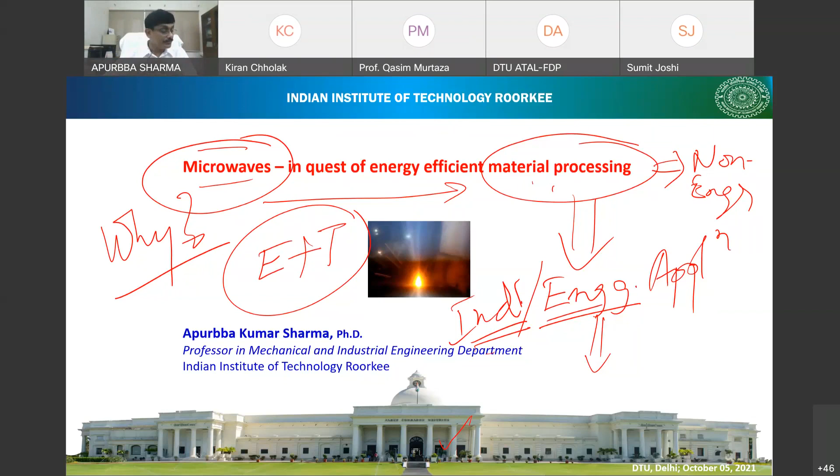Out of these things, we have also tried to make a few contributions in this field. And more and more research will bring this process closer and closer to industry adoption, right? Now, as I said, today's priorities are E plus T, so energy plus time. We are looking for energy everywhere.

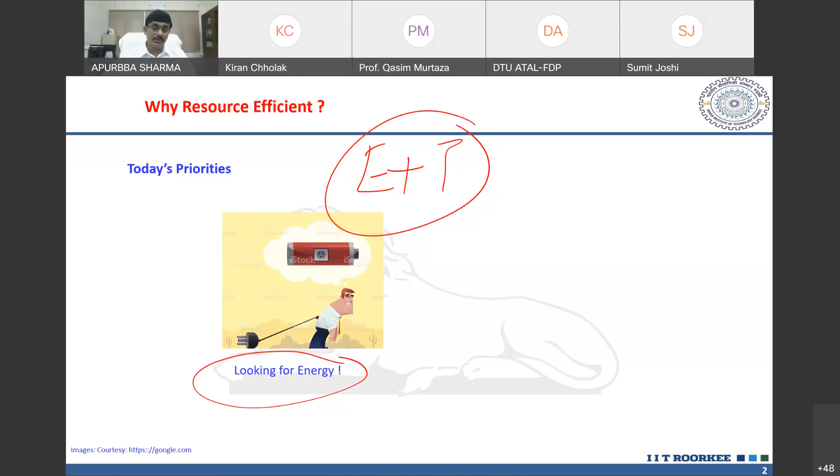There is a sort of crisis. You can see how the cost of energy, like fossil fuels, is increasing. Their cost of production is increasing, their extraction is becoming costlier and costlier, and the source is limited, right? Therefore people are looking for more and more new energy sources which are naturally available. One naturally available source is solar. I should not say best, but in terms of the quantum of energy available, it is enormous.

Then people are trying wind energy, people are trying tides, and hydro is already there. So people are trying more and more to explore these so that we can adopt more and more sustainable approaches.

So in this energy crisis, probably if we can have some energy sources where the actual energy used is only 1/10 of the energy in other conventional sources. Although all of us know energy can never be destroyed or produced, it is only a transformation from one form to another.

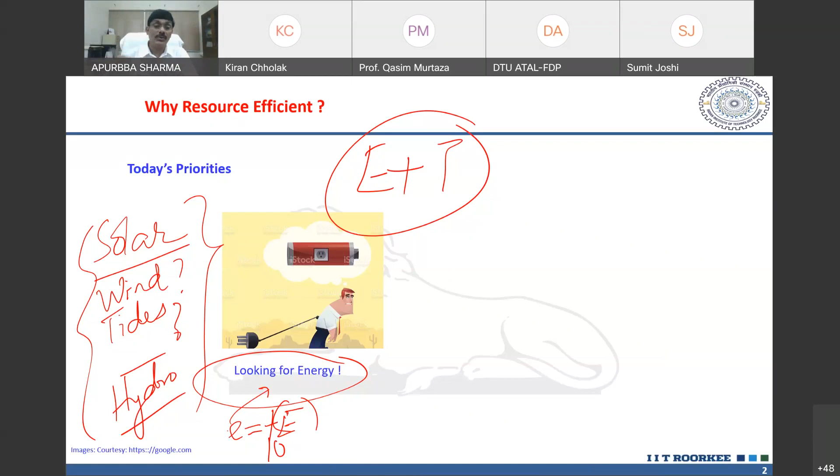Now here's what is happening: for processing 1 kg of material, whatever energy you require in the conventional mode, if I use another source which requires only 1/10, is it not something like we have spare energy? Nine times the energy we have spared from processing the same material, it's like we have saved nine times what I would have otherwise spent.

So therefore it's always there, how to get new energy sources. But from an engineer's perspective, what we are trying to see is, can we reduce the energy requirement for processing the same material up to the same condition? It's not that I'm talking about half-cooked things.

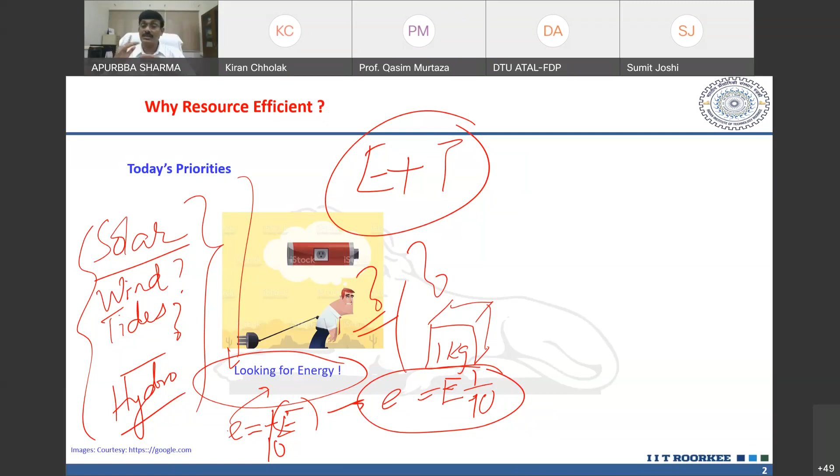Calculating half the energy required for half cooking is meaningless. So the same material processed up to the same condition, but using a different source of energy which requires 1/10 or say 1/5, even if it's 50%, that's a big gain in terms of energy requirement, right?

Similarly, nowadays people are running like anything. After this, I want to do this, I want to do that, I need this within half an hour, I need this within 10 minutes. We don't have time for even taking a cup of tea calmly. While taking tea itself, 10 different phone calls will come, and we may have to attend to this and that. Sometimes without even finishing the food, one is running.

So we don't have time. Now in this case also, if the same task can be done in 1/10 or 1/5 or half the time, then it will be great. That means my processing time is getting reduced, and there I score an advantage. How do I score an advantage?

Nowadays most business houses are running neck to neck competition, trying to make things available to you, be it service or product, at the earliest. That's the competition. So if you're looking for a 4-wheeler, if one dealer says I will make this model available next week, another dealer will say why next week, I will give it to you this week itself. Same with e-markets, everybody is in the race.

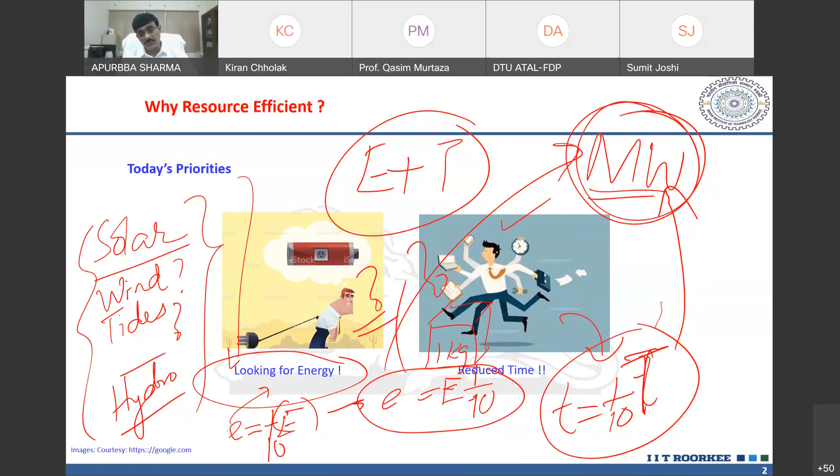So with this background, let me explain a few things with the help of some data published by others, and there is also some data from my own lab.

So if we see why we need to be resource efficient, or why we need to be energy saving, let's look at the requirement. Energy consumption is about 1.4 lakh, or 140,000 terawatt hour. What are the contributions? If we talk about 100,000 terawatt hour, at present crude oil and coal are there. But as you know, these fossil fuel reserves are limited.

And the rate at which we are going, see from 1800 to maybe 1900, the rate was very, very slow. Then from 1900 to 1950, probably it is a bit high, the slope is a bit high. Then from 1950 onwards, you see the slope.

So this is theta 1, theta 2, and theta 3. So these are, if you see, in this scenario, probably we won't be able to sustain it with our available energy. We won't be able to sustain for long. It has already crossed this energy requirement.

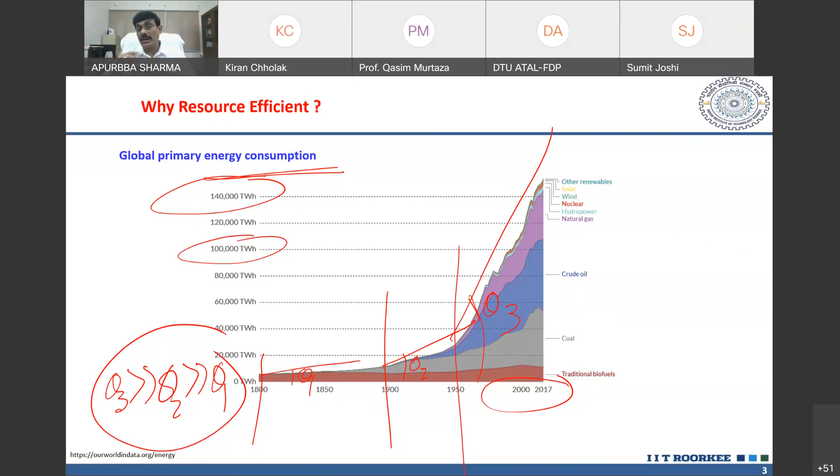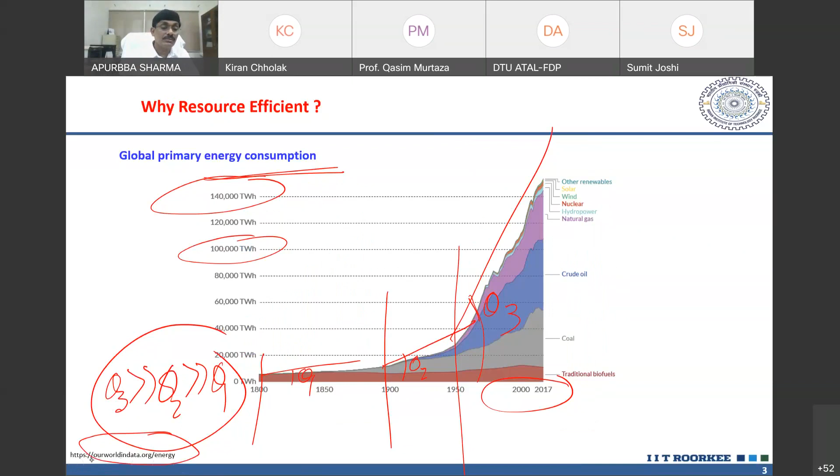Okay, let's see. Of course all this data is taken from some sources, as you can see. I have given you the references also, taken from some other sources.

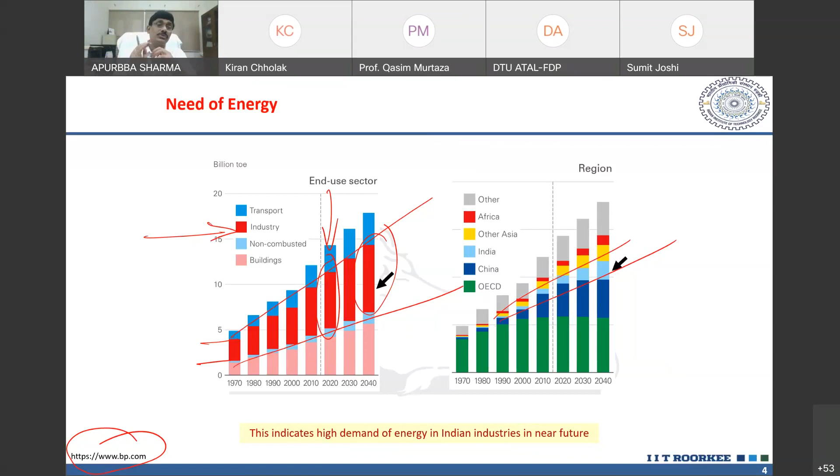Ours is a very big country. Population-wise we have 1.3 billion population now, roughly. That's incredible. And if we calculate energy requirement per head in this country, it is huge, really very huge. Therefore, if we can have some techniques which will reduce energy consumption, it is always better for our sustainability, right?

Then if we talk about manufacturing alone, out of this 100%, manufacturing alone is 40 plus 30, 70%, around 70%. That's in this decade, the previous decade, and it's going to remain almost the same, as the projected figures of 2040 say. Projected figure of 2040 also says 70%.

That means the manufacturing activities' energy requirement is not coming down, and therefore it is very important that we get the energy for manufacturing activities sufficiently in future also. And that is where our need for getting better and better processes or better and better sources becomes very important.

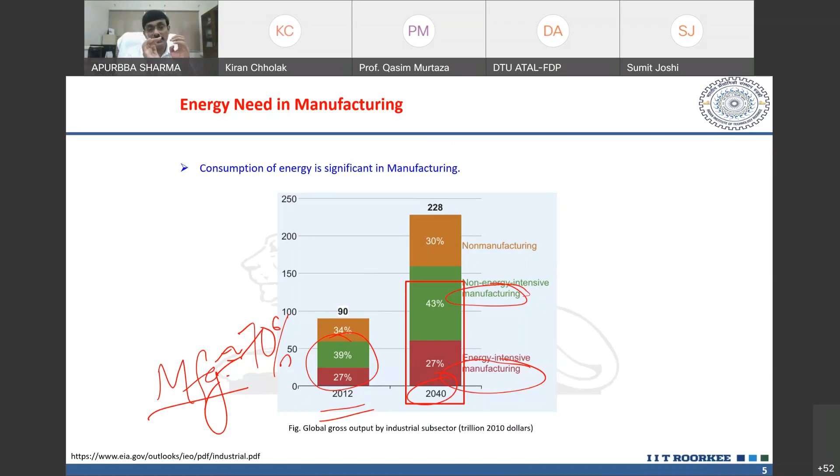Now, if we talk about energy requirement in manufacturing, in material processing, to do some work we need some energy, some form of energy. If we do it by hand, our body is giving that energy, and to the body we fill that energy source by taking some food, same thing. So in whatever form we take energy, somewhere, somehow there should be some source, and that energy will be required for doing several kinds of work.

In manufacturing, one of the very important ways of using energy is interaction with heat. Most manufacturing activities, like casting, welding, different heat treatment processes, hot forging - all these processes need heat during their material processing, and that requirement is huge, as I said.

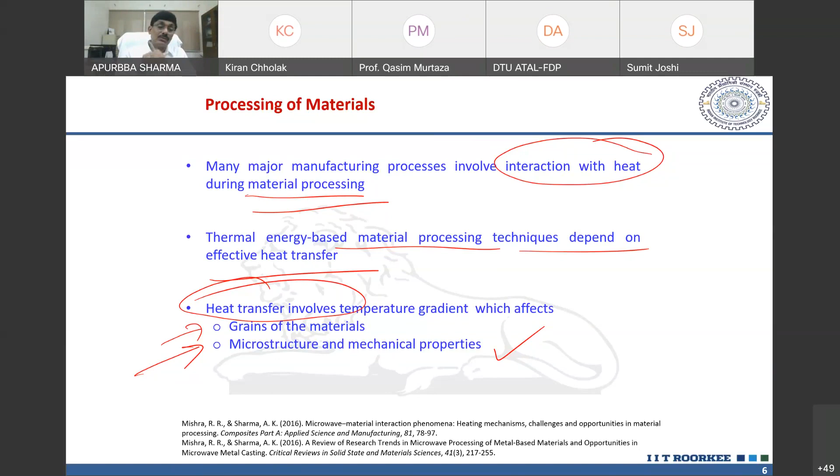But if we examine very attentively the material nearby that hole, there will be a heat affected zone, which is undesirable. We want a hole, but we don't want to spoil the material around that hole. So the microstructure and mechanical properties around that hole get affected. This we call, in our terminology, the heat affected zone.

So that means the mechanical properties and microstructure of this zone are changing. Now our idea will be how we can minimize this zone, call it HAZ. If not zero, we should try to make it zero. So smaller the HAZ, better is the product, or you can say better is the output.

Now, some processes like laser and all, although this is there, it is very limited, very small, this HAZ. But some processes like EDM, the HAZ is very, very high. And that's how, in some cases, that process is not preferred. It's one kind of limitation of the process.

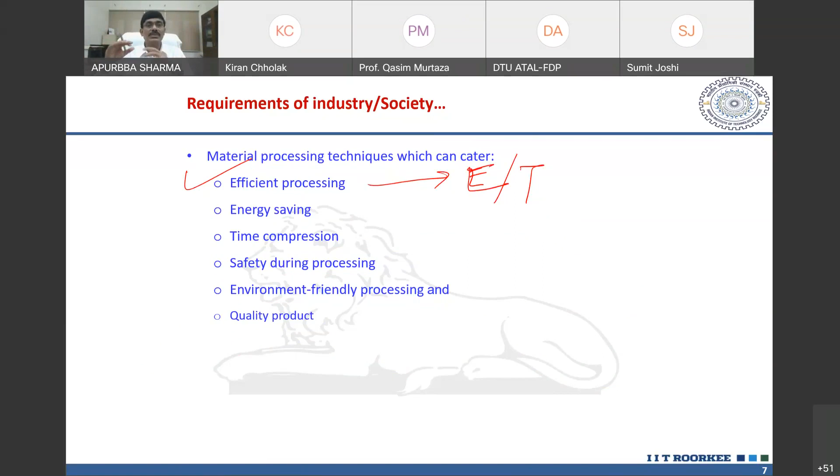So people are looking for efficient processing. As I said, we don't have time, we have limited energy, we have very limited time. So we want efficient processing - machine wise, equipment wise, source wise, everywhere the persons involved in these processes need efficiency. As one example of this, I will be talking about energy and time efficiency here - energy saving and time compression. So we are looking for these two here, energy and time.

Safety during processing is required irrespective of any process. You might have seen in laser work centers, wherever laser processing is there, they will put some warning labels or posters that this is the danger zone, so please don't enter without protection, or be careful while entering. So processing safety is required irrespective of the process.

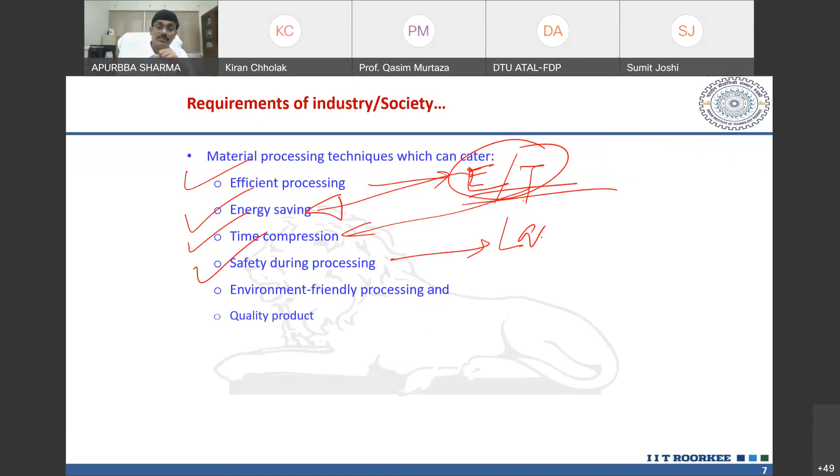And in processes where energy sources like laser or microwaves are involved, one will have to take extra precaution for safety. These are essentially different sources of energy with different characteristics, which work in a different way, and therefore one needs to take care of those things while working with laser or microwaves.

Then environment-friendly processing is also another thing. As you have seen, laser processing on-site is very environment-friendly - no smoke, not much heat radiated, no smoke created otherwise. That's a plus point of working with laser. So is with microwave - no on-site heat produced, no on-site smoke produced. These are some advantages that contribute to the environment at the site where material processing is going on.

But of course, if you ask me, is it always safe or always environment friendly, then probably not always. We are using microwaves, or for laser we are using electrical energy, and we will have to admit that wherever that electrical energy is being produced, probably some carbon footprints are being created. If it is a purely natural source like hydro energy, it is pretty less. But if we are using others like fossil fuels, then the carbon footprints produced are relatively high.

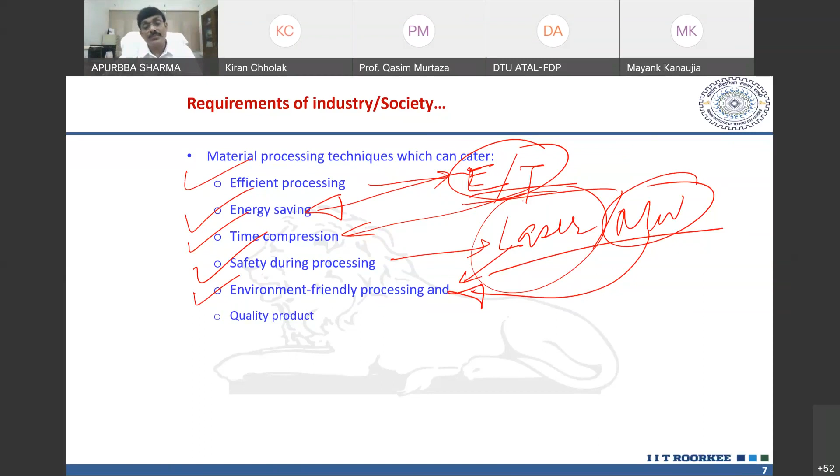Then quality product. This is another important thing. Nowadays, people have money. They are ready to pay, but in return they want quality. So money they are ready to spend. Even for a phone, I'm not talking about everybody, but why do we need a phone? Okay, now it has become a kind of multitasking device, but earlier we needed it only for talking or sending a message, some mere kind of communication.

But for that, maybe a 5,000 rupees handset will work, and a 50,000 rupees handset will also work. A 1 lakh or 5 lakh handset will also work. But people are spending money on that. They are spending more money, provided they get a better quality product. And in this, as I said, mechanical properties are very, very important.

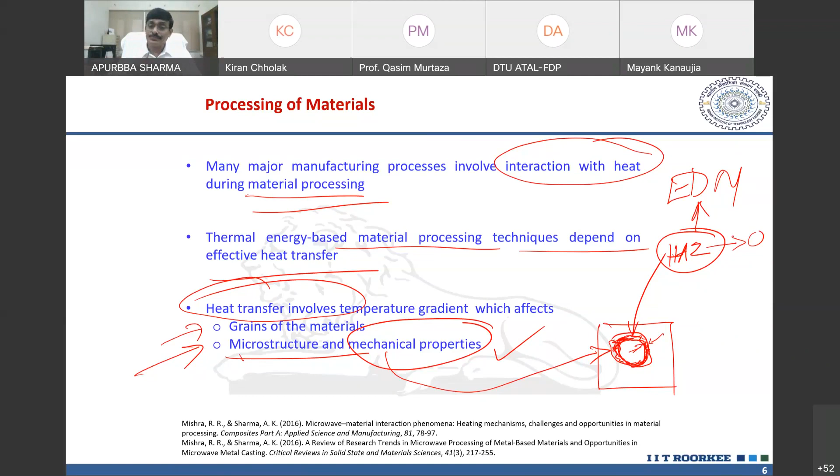So what if my energy consumption is very less, but while doing the work, I have lost the mechanical properties of that part, or the part is no longer useful? Or I'm using 50% energy, that's fine, but it is taking double the processing time of a conventional mode. Then also it is not useful, right? Therefore, quality product, as well as energy efficiency, as well as time efficiency, all these things need to be taken care of while producing a product or services, right?

And in this, I'm very happy to share with you that if you use microwaves for material processing, many a times people have reported that quality improvement is there. That means with microwave, you can find energy efficiency, time efficiency, as well as better quality. Now, if all these three major requirements are satisfied, or it has the potential to satisfy them, then probably it is worth looking for a process which could be a sustainable solution to this.

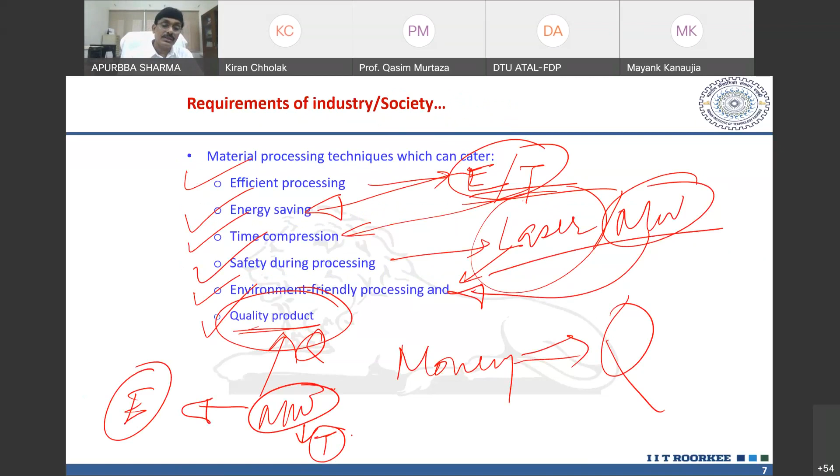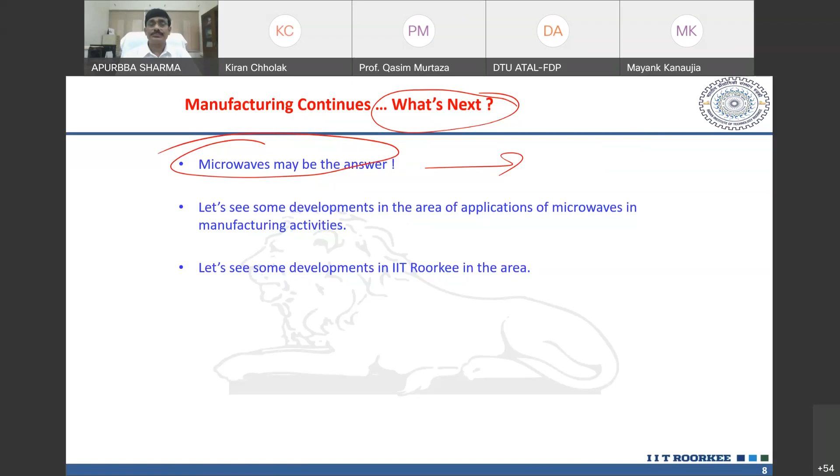So as I have already said, for all these requirements, if we ask what's next, which can give me the solution for energy, for time, for quality, probably microwave may be the answer. And how this is not a probability but a reality, I will be showing through some data, my own data and data published by other people. Right? Fine. So some developments I would like to show you, and some of those are from IIT.

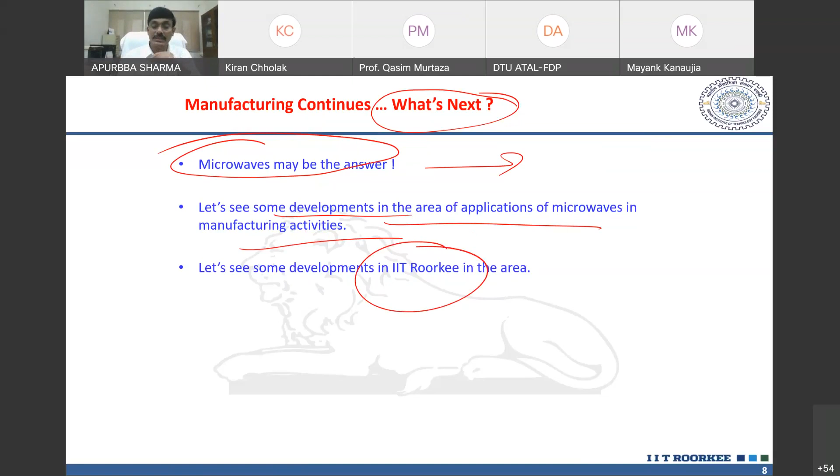Professor Murtaza? Yes, sir, please. Okay. Everything going fine? Yes, sir. Am I audible? Everything is fine. Okay. Yes, sir. Right. Thank you. Yeah, thank you, sir.

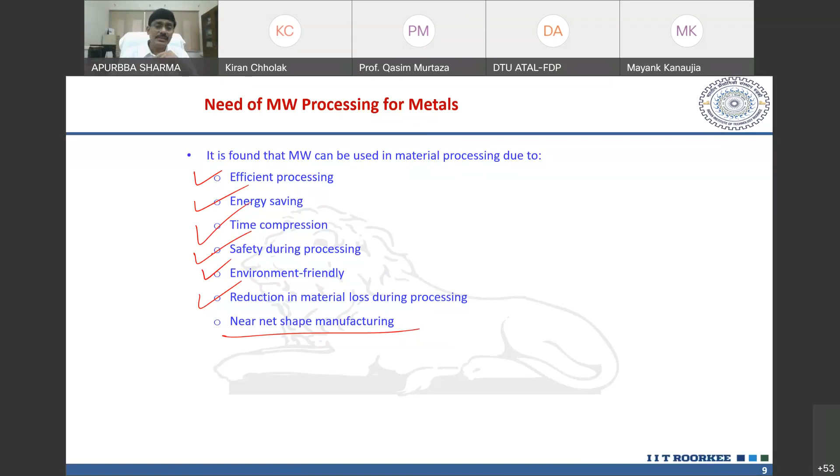So already I have told about energy efficiency, time efficiency, safety, environment friendliness, then reduction in material loss during processing. This is another factor. And then near net shape manufacturing. This is also another aspect. You do not need secondary processing after this in most of the cases, right? That also helps in energy saving, cost saving, time saving. If in one go you can have a near net shape product, then you need not go for secondary processing, which involves time, energy, material handling. So all these things are very, very important.

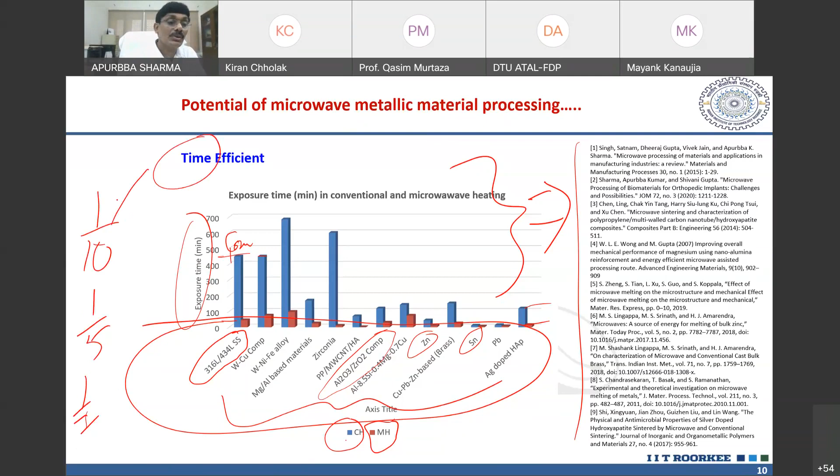And here we have found the requirement is 1/10, 1/5, or half, or whatsoever. So this is incredible. Oh, sorry, this is time requirement. Sorry, I'm talking about time. Okay. Similarly for energy also. Now let us see the energy requirement.

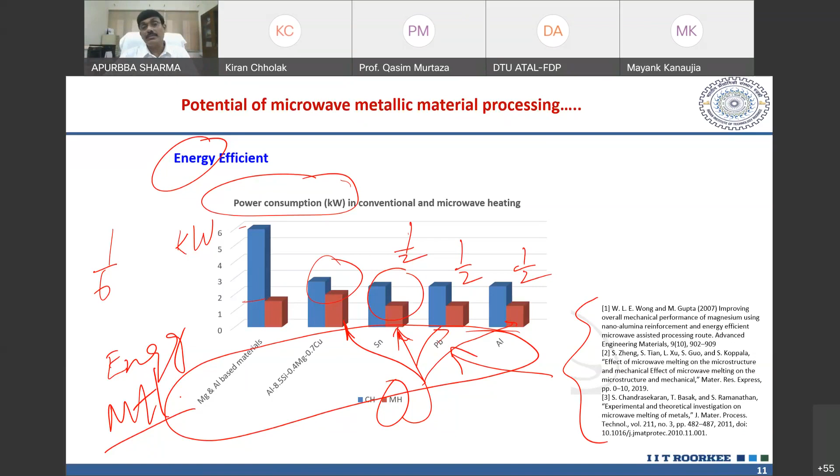I'll try to show you some data, and with those data, I will try to convince you that microwave has got better possibilities or better opportunities to be used in industrial use, which can help us in achieving energy sustainability, or achieving better processing time. Let me give you one more example here. This is again published data, not my own data.

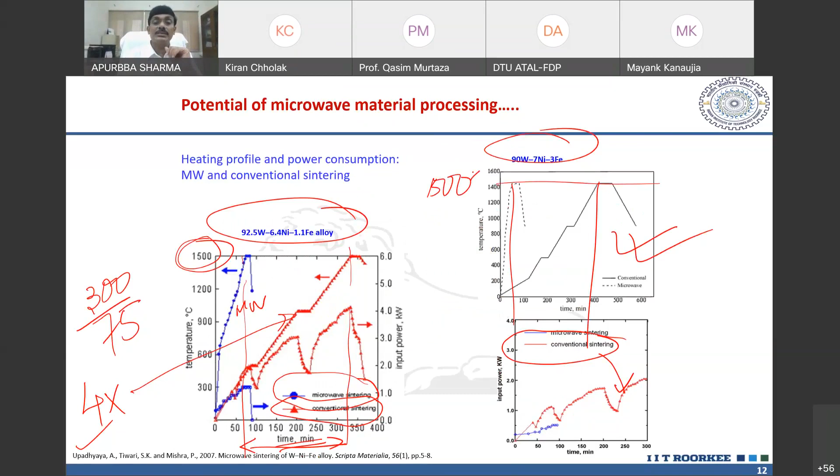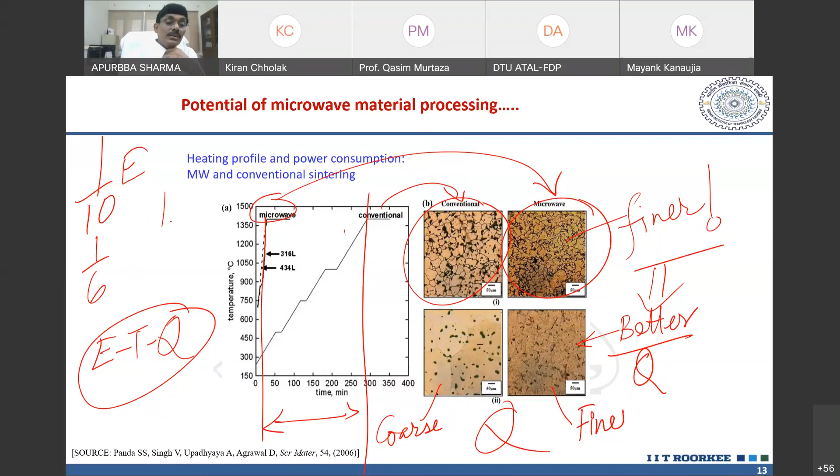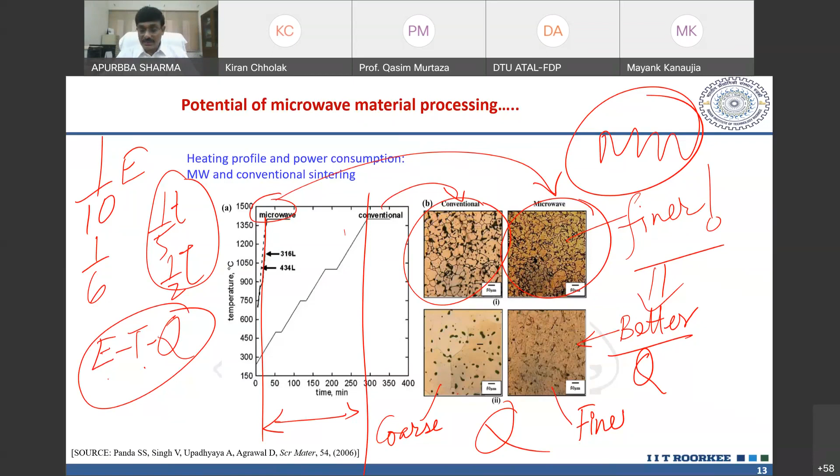We are taking 1/5, 1/2 of time for processing, and at the same time, we are getting better quality product also. That means all these criteria are getting satisfied while using microwaves, right? Therefore, I think this much is sufficient to establish that yes, it has got better future or better potential to be used in material processing.

However, the things are not very easy. It has got its own challenges. A lot of challenges are there, and that is the reason why it is getting delayed. We do not know much about these microwaves. Microwaves, from the very beginning, are being explored more and more for communication purposes, not for material processing purposes. Therefore our knowledge is limited, and once we do more and more research, we will have better knowledge, and we will be able to use it in a better way.

Then operating condition, power, frequency. So here also it is one more thing. The operating condition, you cannot use it like welding torches. You bring it to my room, you can do some welding here. With microwave or laser, it is not the case. You need a specialized equipment, and you need a kind of specialized environment also. In laser nowadays, you can take it a few meters using optical fiber cables. But in microwave, that condition is yet to be achieved.

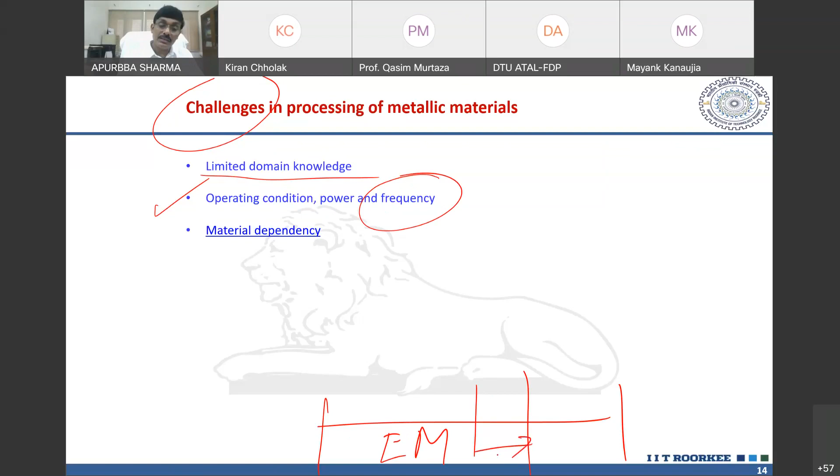Then frequency is also another thing. We do not have all the frequencies available in our electromagnetic radiation bandwidth. This is nothing but EM, electromagnetic radiation. In electromagnetic radiation, there is microwave, laser, visible light, infrared, UV, and different spectra. All these are within certain frequencies of electromagnetic radiation, right?

Within this microwave radiation also, we cannot use all the frequencies. We have some limited: 2.45 gigahertz, 915 megahertz, and then 30 gigahertz. Only a few frequencies are allowed for industrial use. So it is not that tomorrow I can say I want to use 3 gigahertz. No, that is not permitted.

In microwave itself, some frequencies are being used for communication. And in communication, some are used for television, some for radio communication, some for defense communication. In radio communication itself, for civilians there is a different frequency, and for defense people there are different frequencies. That's the reason why we cannot hear what the defense people are talking about. They use very specialized frequencies and equipment to transmit and receive. So these are some of the challenges. We don't have the liberty to use whatever we want.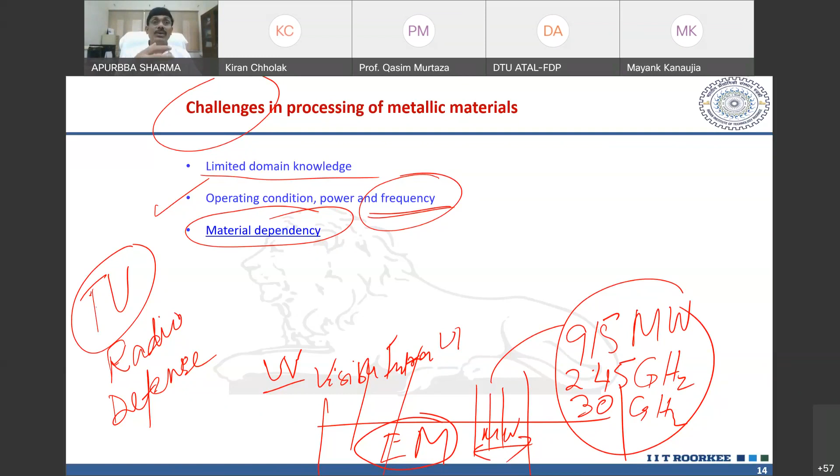They say microwavable. They will give you some cookware which can be put inside the microwave oven, but it will never get affected. Keep milk inside that pot, the milk will get heated up. If you keep rice inside, it will get cooked. You keep meat inside, it will get cooked. But that bowl or plate will not get anything.

In fact, it will not get heated also. That is the beauty of material dependency with microwave. Okay, you are keeping on a plate, say meat, say potato or whatsoever inside that microwave oven. Potato will get boiled, means there will be lot of heat. But the plate or the bowl in which you are keeping that, it will not get affected. It will not get heated up. So it's a kind of wonder. Why it happens, that also I will tell.

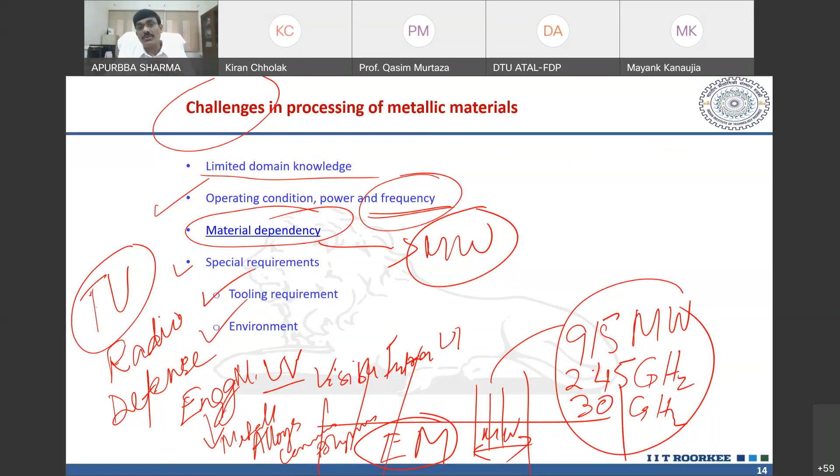Then environment also. As I said already, for laser and microwave, we need some kind of protected environment so that safety can be ensured. Then in some cases, now we are doing research, we need noble gas environment, like argon gas environment, or in some cases liquid nitrogen, or sometimes we are using water, some dielectrics. Inside that dielectric, we are doing microwave machining. So that is a kind of environment that is required for doing microwave processing.

So even though all these limitations or restrictions are there, people are working on processing materials using microwaves. Almost all types of materials are being processed, like ceramics and CMC, meaning ceramic matrix composites, MMC, meaning metal matrix composites. Then chemical synthesis also people are using, and it is found to be very effective. Chemical reactions get enhanced; the speed of that reaction becomes very high. Then rock, cements, medical and drugs, very effective. Polymers and PMCs, polymeric matrix composites. Of course, food and drying, it is there in any kitchen.

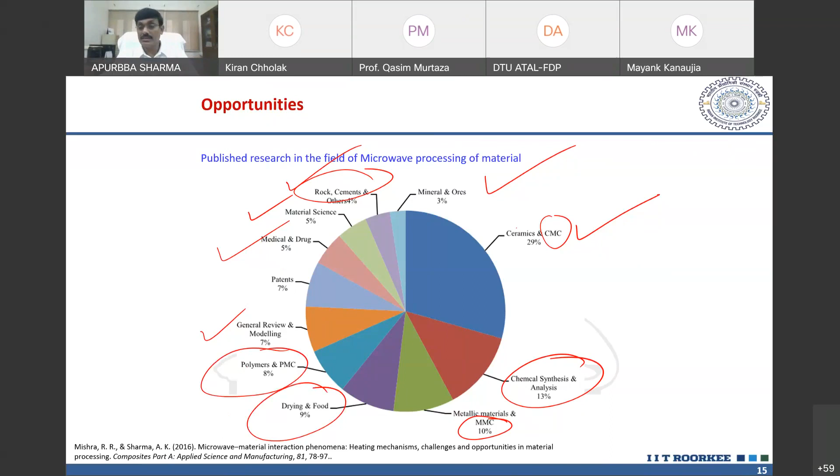However, there are opportunities. Although we have processing constraints as far as the materials, frequency, power, and safety are concerned, still there are ways to do it. As I said, today I can join stainless steel to stainless steel, weld stainless steel to stainless steel, or weld two pieces of Inconel by using microwaves. So there are opportunities. It is now my inability to develop a device similar to or better than that welding system. If I can do that, probably microwaves will work in that mode also, right?

Then target metals, ceramics, polymers, and composites, PMCs, CMCs, and MMCs. All these can be processed with microwaves. Then other materials also, glass and chemicals. Glass we are processing. We are working on glass drilling. We are trying, and we have got some success. I should not say we are completely successful.

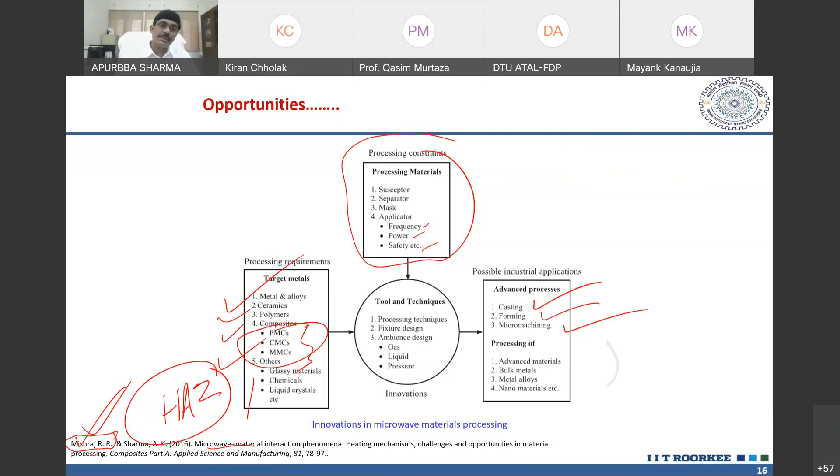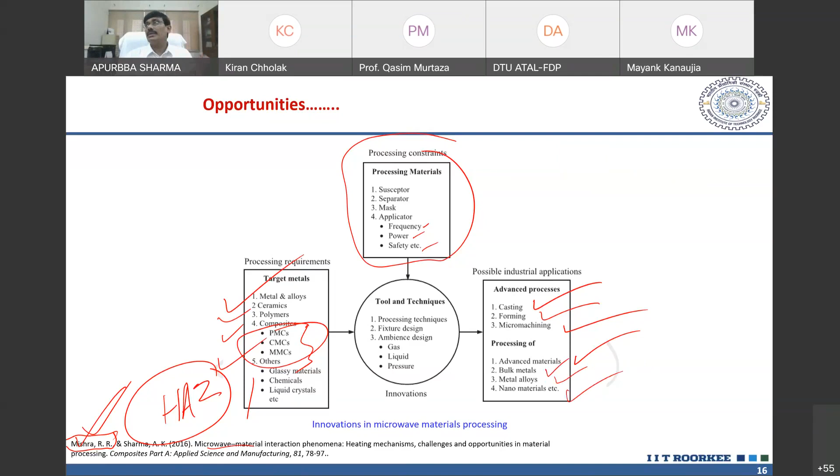Then possible industrial applications: as I said, casting, forming, micromachining. We have filed patents in casting and micromachining, and we are waiting for some more. Then advanced materials: composites, cladding, etc. we have developed. Composite joining we have done, composite curing we have done. Bulk metals, alloys, nanomaterials we have worked with. So for various materials we have used it.

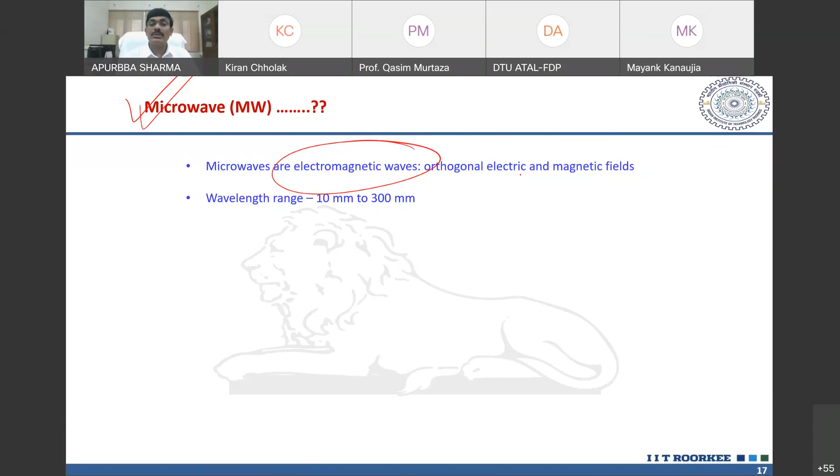Now let me give you a very brief idea about what microwaves are. Microwaves are nothing but electromagnetic waves, with two components orthogonal to each other. One component is electric, the other is magnetic. If one is in this plane, the other one is in this plane. I will show you. And the wavelength is this, as I said, and the frequency range is corresponding.

Originally they were used for communication, but later this gentleman, Percy Spencer, found out that they can be used for material processing also. He was a defense communication engineer working on defense projects, using microwaves for his communication equipment. He was working in a camp where the temperature was below 0 degrees Celsius.

While working, he found that chocolate pieces he kept on his table near his equipment were melting. Is it not something very curious? He is working at a sub-zero temperature, and the chocolates are getting melted. That is sort of unbelievable, and he became very curious.

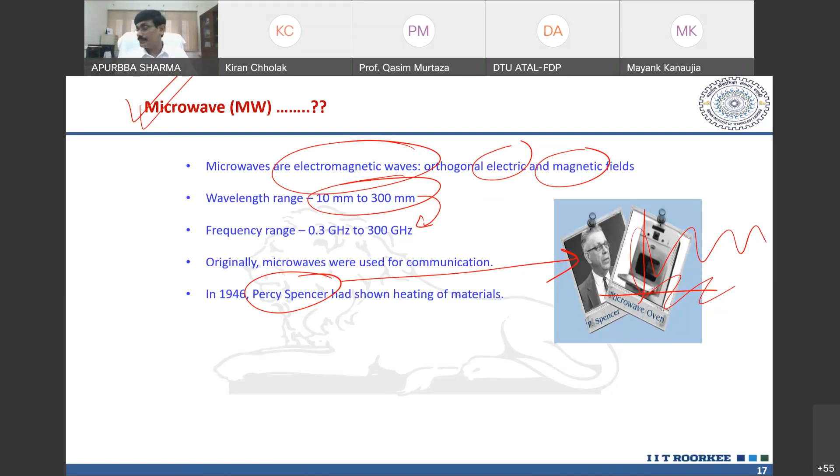After thinking about many things, he could find only one reason: the chocolates were getting melted only because of his microwave equipment. The equipment itself was very cold, he found. Therefore, it must be the microwave frequency he was using which caused this. That's how he postulated that microwaves can be used for heating materials, and he established it in the year 1946. That's why I say it is almost a 70-year-old technology.

And he developed a microwave oven. This is the microwave oven. It cost around 5,000 US dollars at that time, and nowadays microwave ovens are found for 50 US dollars, so it was 100 times costlier. He developed the world's first microwave oven for material heating purposes. He knew that it would work, and he got it patented. And the frequency used is again 2.45 gigahertz.

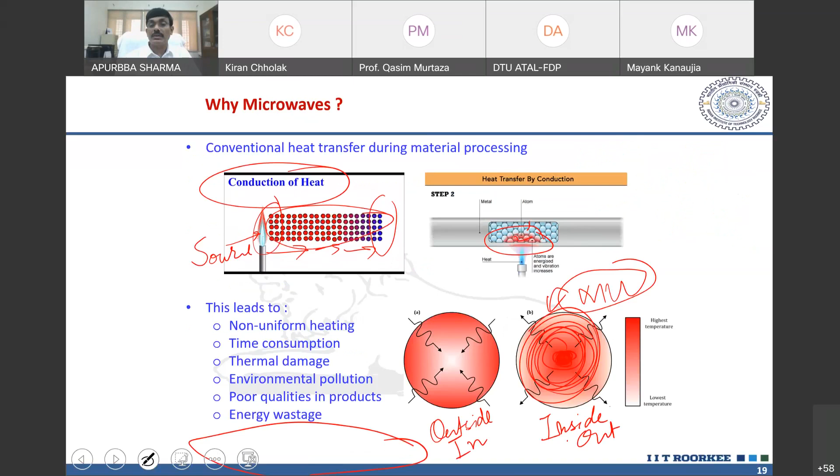Now, when you allow microwaves to move through this, because of the electrical component we've seen, when the positive half comes near this atom, what will happen? The negatively charged oxygen will be attracted, and the hydrogen will be repulsed. When the next half comes, the negative half, then the reverse effect will take place.

This takes place at 2.45 gigahertz frequency. So think about what that means - in almost 1 nanosecond, this reversal will have to take place, positive to negative, negative to positive. But because of their own inertia, it cannot follow, and therefore there will be a lag, or you can say a loss of energy.

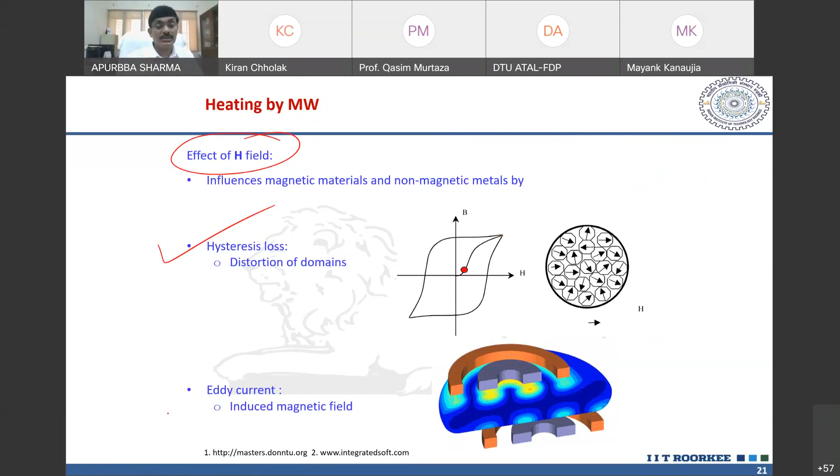This cannot keep up the same speed with that of 2.45 gigahertz frequency, and that causes heating inside the material. I gave the example of water, but there are other mechanisms as well, like conduction losses, dipolar losses. Similarly for the H field, magnetic field, there are mechanisms like hysteresis losses, eddy current losses for conducting materials, and electron spin. There are so many other things.

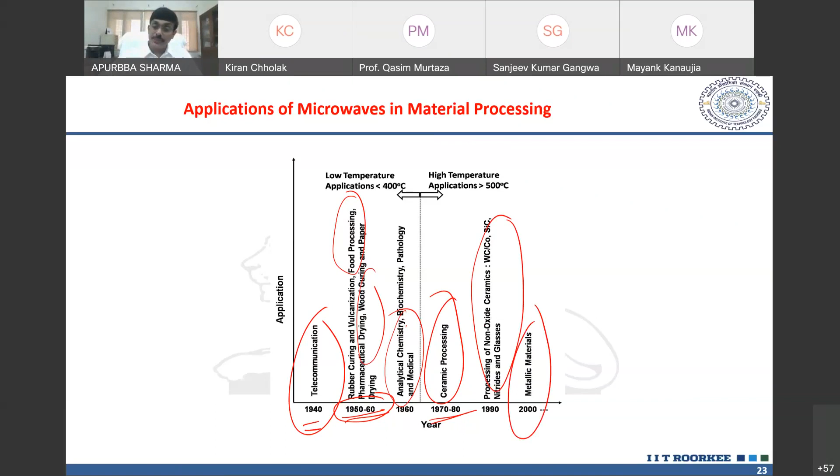I don't have much time, so I'll skip those things and give you a quick recap. Microwaves were used for telecommunication around 1940, then for rubber curing and similar heating applications. During the 1950s and 1960s, food processing was dominating with some industrial use too. Then chemistry people picked it up for chemical processing, plastic processing, curing, and ceramic processing. In the 1970s and 80s, serious engineering material processing took place. From 1990 onwards, it was extended to more materials, and from 2000 onwards, it got extended up to metallic materials also.

Now almost all sorts of materials are getting processed by microwave. We have published this in a paper, the Composites Part A paper. You can take the reference of this paper and look it up. We have given everything there.

As far as low temperature processing is concerned, a lot of materials like biochemicals, paper, cooking for different foods, wood, and some low temperature ceramics have been processed. These are low temperature applications, mostly synthesis and drying.

During the 1970s to 2000s, sintering was the dominant process, and there also microwaves were used for microwave sintering. Then drilling, glass processing, soldering, brazing - different processes used for different materials like carbon nanotube and other materials.

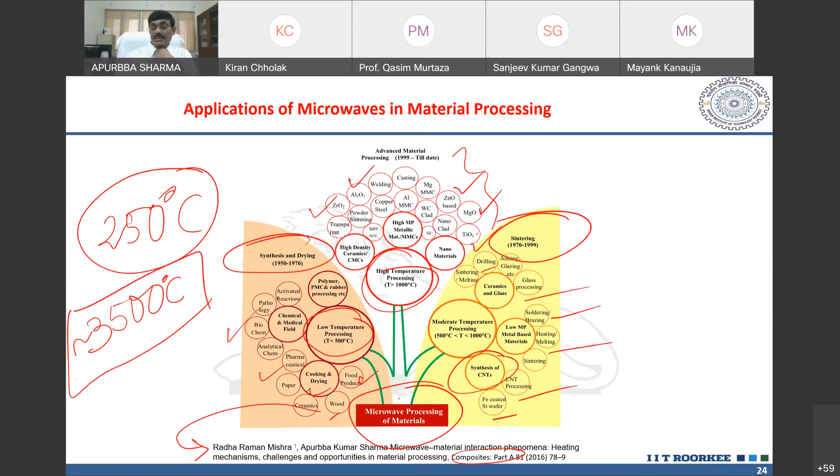I'll skip this, I don't have time. Rather, I will give you some examples of what we have done at IIT Roorkee.

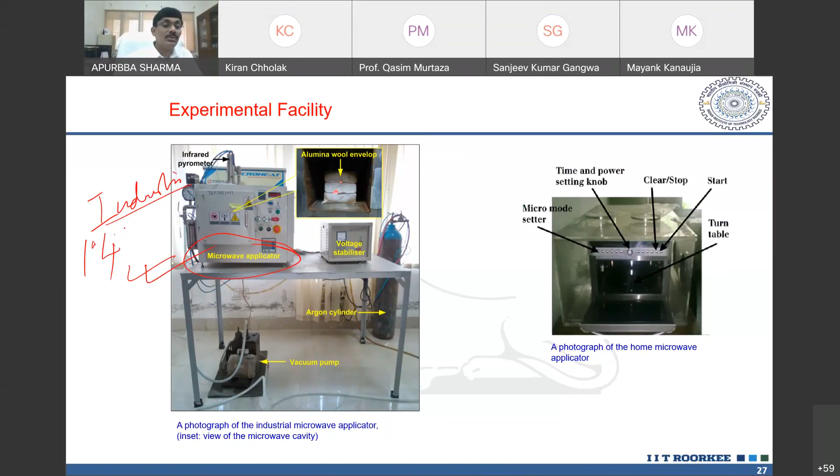This is one microwave applicator I am using in my lab. It's an industrial type but has only a capacity of 1.45 kilowatt. We have a vacuum pump also, and we have facility to put argon gas inside. So these types of facilities allow us to create different environments inside this.

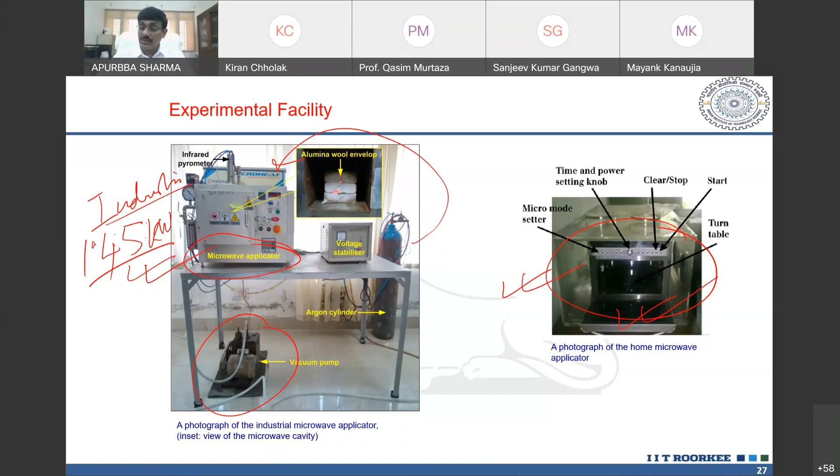Then we have one more type, which is actually a home microwave oven, whatever is available in the kitchen. We have been using this for several years, almost 15 years, for my research. Many PhD scholars have got their degrees using this oven.

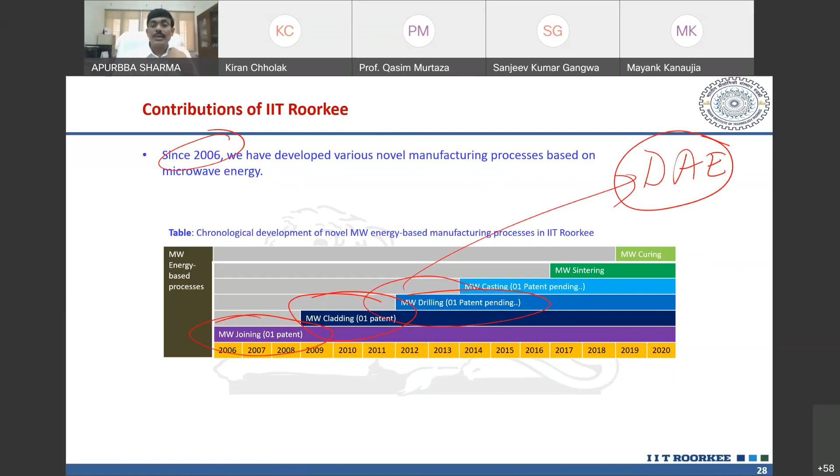Since 2006, we have been using these microwaves for various processes. One is joining - we have obtained a patent granted for this. Then we developed cladding, and we have got a patent for this. Then microwave drilling, we have filed a patent - this is a joint patent with the Department of Atomic Energy, DAE, for microwave drilling of glass material.

Then microwave casting - we have developed in situ microwave casting. Inside the microwave oven, you can keep the metal block or bulk metallic materials, keep a mold inside, and you will get the cast. That also we have done. And now presently we are working with microwave sintering and curing.

I'll show you some results. We are getting good results within very less time - less energy requirement and less time requirement are both getting fulfilled. Quality-wise, in many cases we are getting almost at par quality, in many cases better quality as far as microstructures are concerned, and in some cases we are getting bad quality, in the sense that we are getting more heat affected zone.

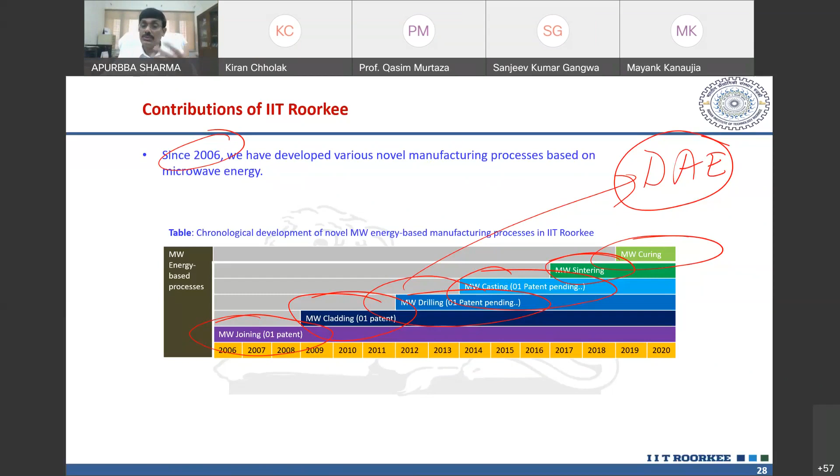Higher the heat affected zone, worse is the quality. So that I must tell you, okay, and yes, that is the case. So in those cases, you need more and more resources.

Say microwave casting. This was developed by my student Mishra and me. In fact, this was started with a BTech project group. They did some work, and later on they could not finish. BTech students have less experience and put relatively less effort in this, but nevertheless they got a good beginning.

And later on, Dr. Mishra has graduated and got his PhD degree. As a PhD scholar, he got it developed, and we got a patent for that also. We have applied for this, and now we are waiting for the final granting of that patent.

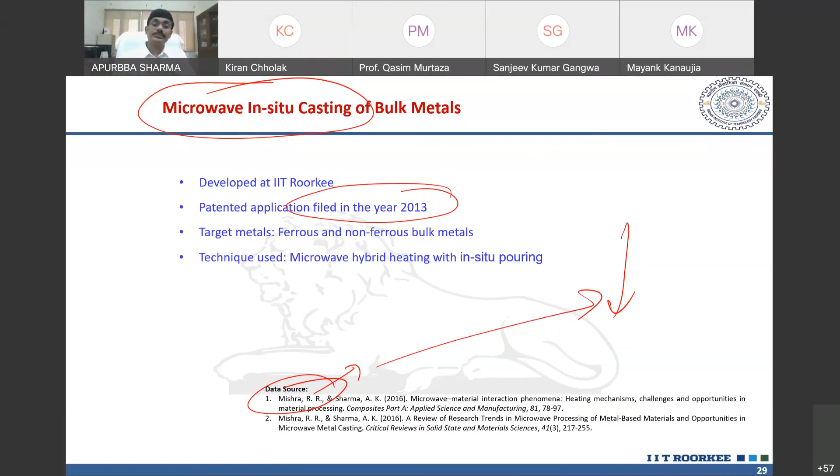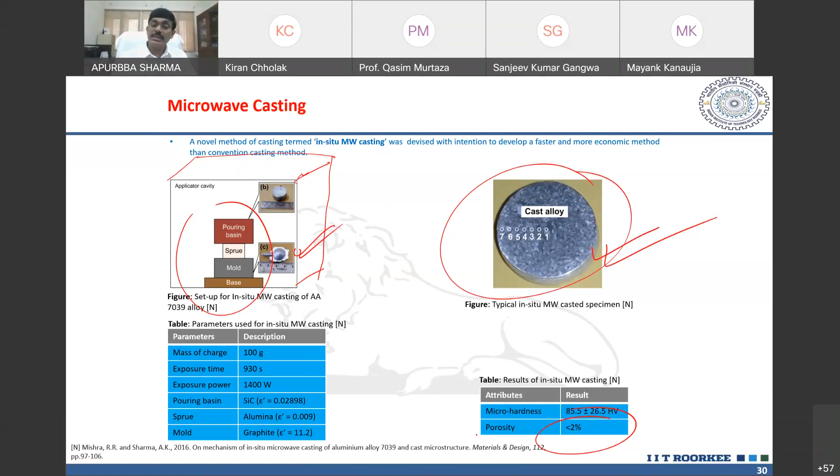And we have found that quality is even better. Porosity is very less, very, very less, okay? And microstructure is better. Properties are better. So we have characterized that microstructure, how at different locations microstructure can be different, that we have seen.

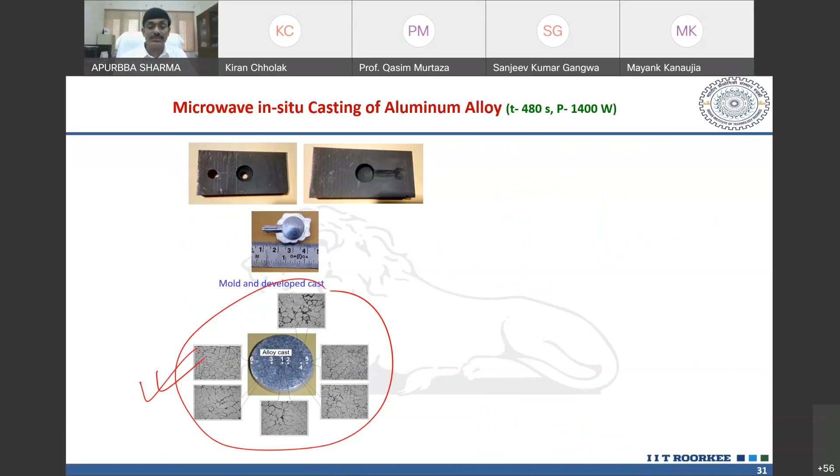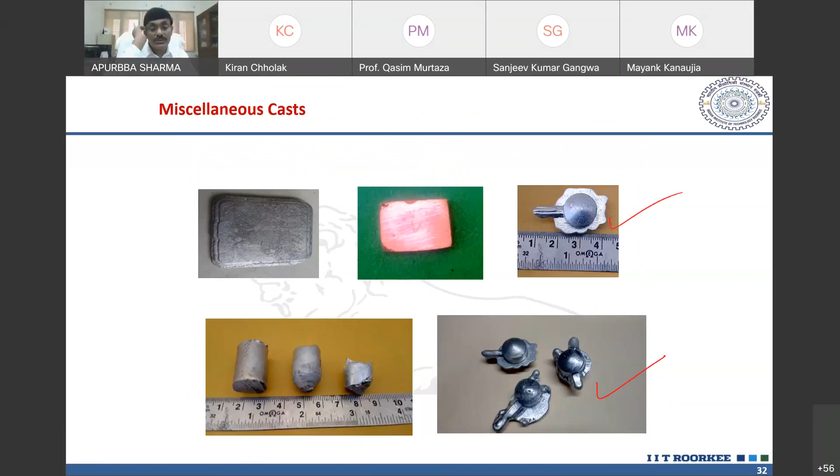Then these are different casts, some copper, aluminum alloys, stainless steel, some aluminum alloys. This is copper. So we have used this type of things.

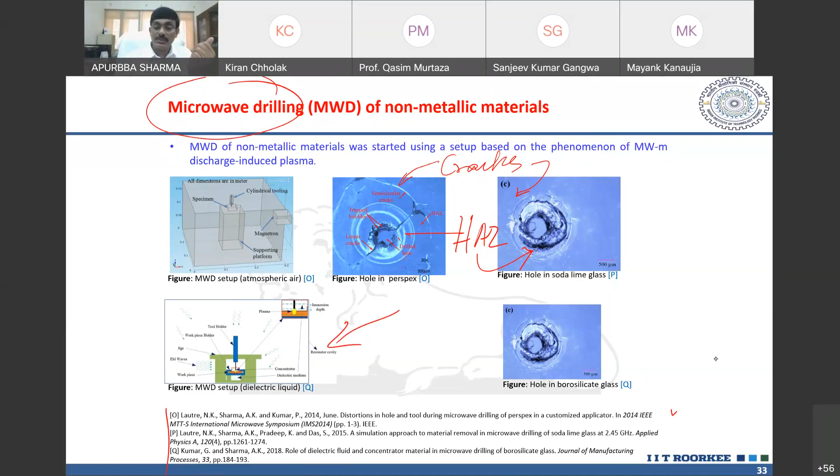So we have got limited success, but we are trying to make it better and better every day with different arrangements, etc. So we are getting better results. We have worked on this, and we have published also. You can see these papers, etc., and you can always find out.

Some holes are very good, okay, very good, but some holes are having HAZ, as I said. So these are not very good. So these we need to better or improve upon.

This is how microwave drilling is done. This is the drilling zone. This is where the drilling is taking place. And this is what you have seen in my first slide also. That is from my lab.

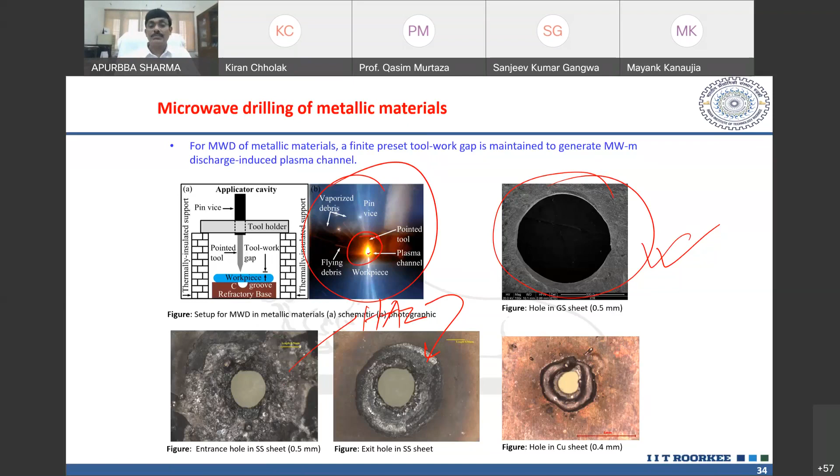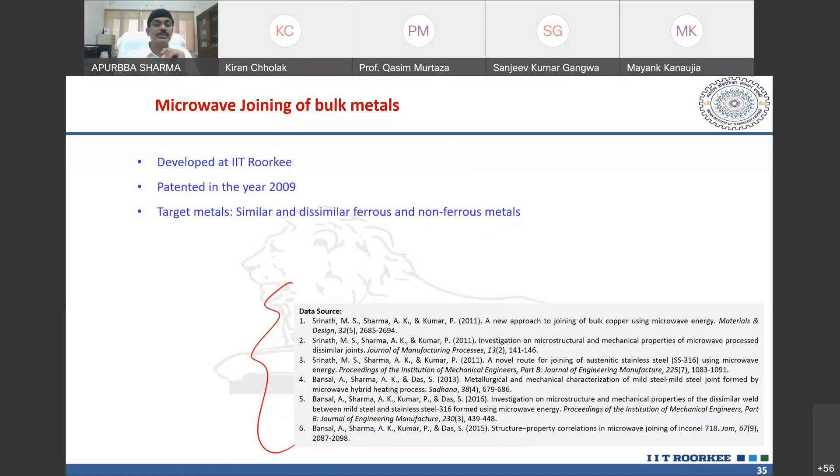So joining also we have done a lot, cladding also we have done. We have done joining of mild steel to mild steel, stainless steel to stainless steel, inconel to inconel, stainless steel to inconel, similar and dissimilar joining we have done. We have patented this also.

So I think with this, I would like to conclude. It is for sure that microwave energy can be used for energy saving and processing time saving, as well as the product quality also will not get suffered this much. So the only thing is that we have to keep working.